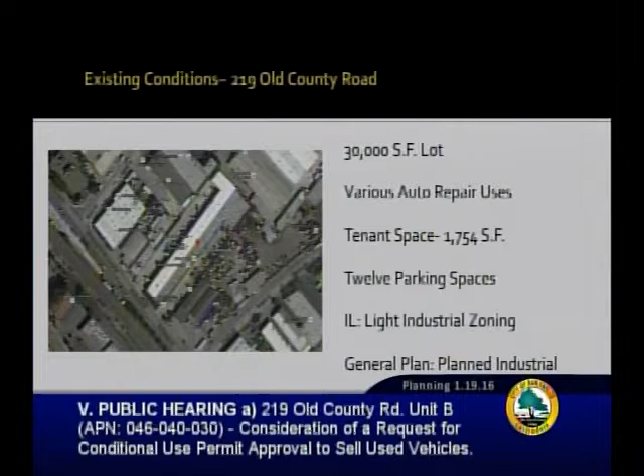The applicant is requesting a conditional use permit to add used vehicle sales to an existing smog and auto repair business at 219 Old County Road. The project site is approximately 30,000 square feet, with a complex comprised exclusively of auto uses. There are 12 parking spaces for this business, 5 inside the tenant space and 7 outside. The property is located in the IL, Light Industrial Zoning District, and has a general plan land use designation of planned industrial. Surrounding the property are uses such as contract services, auto body and repair, and kennels.

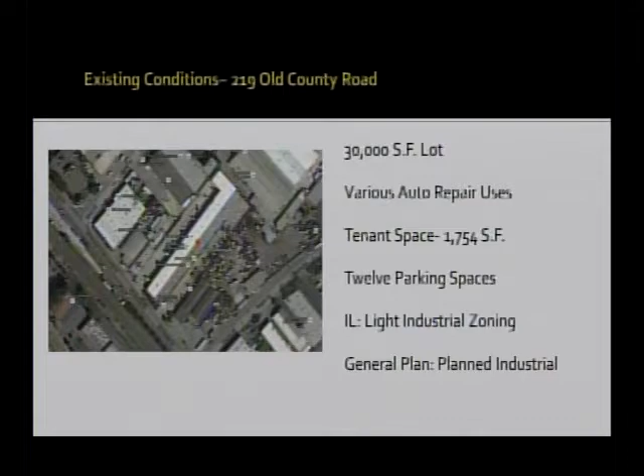The applicant proposes to continue his existing smog check and auto repair business, but supplement it with used vehicle sales. There's an office space which will be utilized for sales, and one interior parking space which will be used for auto sales display parking. Business hours will be Monday through Friday from 9:30 a.m. to 5:30 p.m. A complete analysis of the parking is within the staff report, and this existing parking is non-conforming.

However, the new use will not trigger any additional parking requirements, and therefore approval of this use would not require the addition of any parking spaces on site. All used vehicle sales will occur within the enclosed building, and no exterior changes are proposed.

A typical day for the auto repair portion of the business includes 1 to 3 cars, 3 at the most. The addition of auto sales to this space should not generate a significant amount of additional traffic, since the applicant anticipates 1 to 2 sales per month. None of the reviewing departments had any conditions of approval or comments to add, and staff has not received any public comment with regards to this application.

These are the required findings, outlined in the staff report. The proposal meets all findings, namely the proposed use is consistent with zoning code requirements with inclusion of the proposed conditions in the conditional use permit. Should any negative impacts or significant changes be proposed in the future, the Planning Commission could re-review the proposal. The project is consistent with the general plan and suitable for the site, as the tenant space is located within a multi-tenant building which contains all auto repair uses.

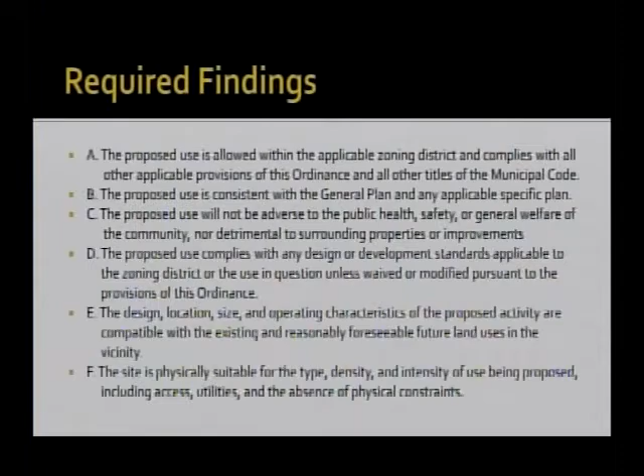The site access already exists and the addition of auto sales will not require any additional utilities or services. This is the motion you would make should you choose to approve this item. I'm available for questions, and I believe the business owner is here as well.

Thank you. Any questions for staff right now? I don't have any speaker cards for this item. Is there anybody that'd like to speak on this matter?

I just have a couple quick questions. Any concerns received from the public since we received the report? No, nothing. Okay, and then I guess what happens if the vehicle sales exceed the 1 to 2 per month? Does something get triggered? Does a new review get triggered? How does that process work?

Let me get to the conditions. I would also like to add, I believe the applicant only has a space to have one car at a time within the building. There's an additional area within the floor plan that he's proposing to use for the one car required indoor area location. Oh, I see. Yeah, and he can't reduce the number of bays, exactly.

Got it. So that brings up the question I have, which is: is he only going to be selling one car at a time? Are there going to be cars located outside in the parking spots? And if so, is he only going to be displaying one car at a time? My concern is that this not impact on-street parking on Old County Road. So can we get the applicant to answer those questions?

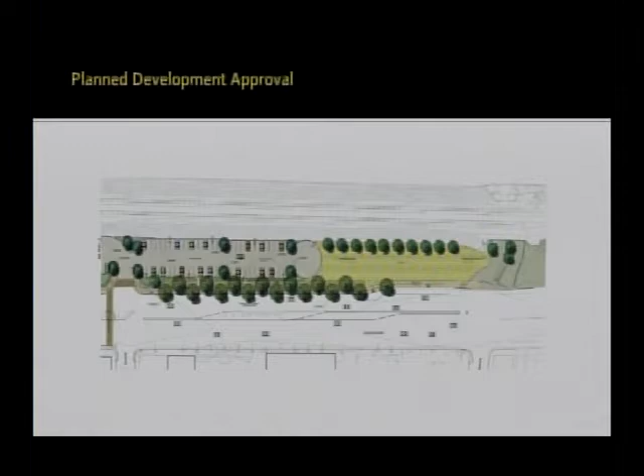I'm not going to provide a presentation about the current proposal because Samtrans has one, and they will go through it in detail.

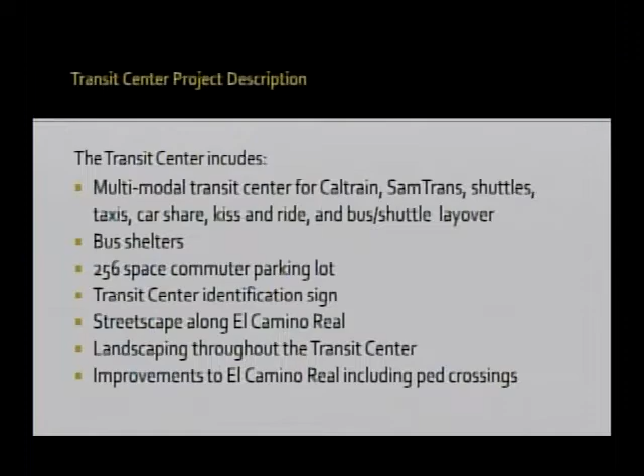The transit center includes that end of the parking lot, which provides area for kiss and ride, buses and shuttles, car share, taxis. It includes bus shelters, the 256 parking spaces, transit center identification sign, streetscape along El Camino Real, landscaping throughout the transit center, and improvements to El Camino Real, including improved pedestrian crossings.

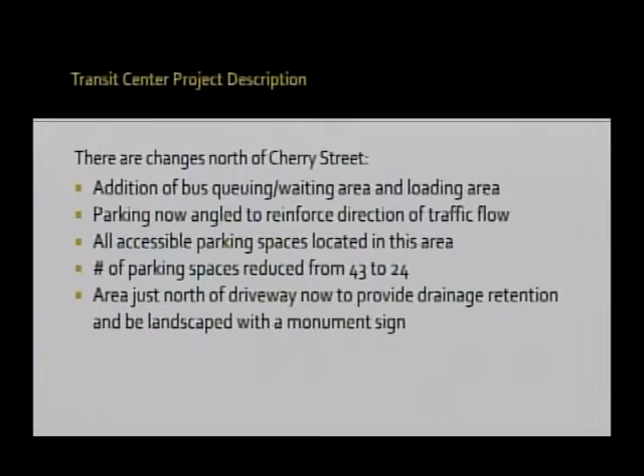As I reviewed earlier, these are the changes that have occurred in the area north of Cherry Street. And it's important that we talk here a little bit about what is the purview of the city and the Planning Commission. Projects by other public agencies are not normally subject to city review.

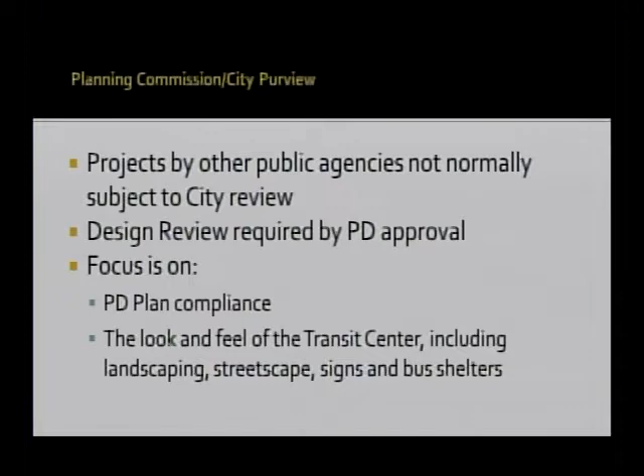Design review is required as a condition of the planned development approval, and it focuses on compliance with the planned development conditions and the look and feel of the transit center, landscaping, streetscape, signs, bus shelters, those sorts of things.

The project is not going to be subject to requirements for a dirt haul permit, grading permit, tree removal permits, or building permit, but it will require a city encroachment permit for work from the curb line to the property line, permits from Caltrans for work within the right-of-way, city permits to connect to the drainage system, and permits from Cal Water for connection to the water system.

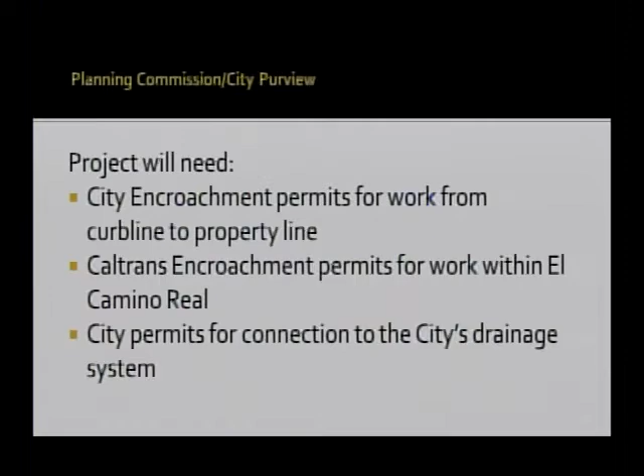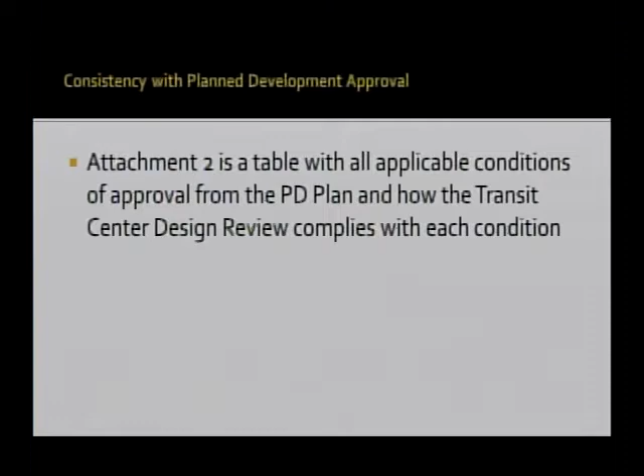The project, we went through all of the conditions of approval. It's included as a table, attachment 2, showing all of the conditions of approval from the planned development, including the mitigation measures and how the project complies with those.

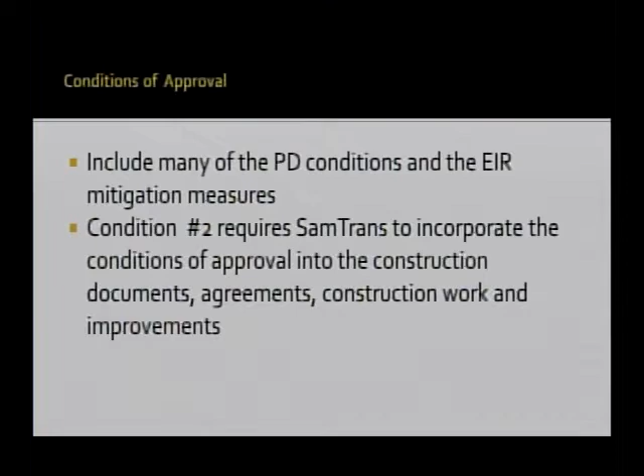The conditions of approval carry forward many of the planned development conditions that aren't specifically satisfied by the plans and the mitigation measures. And condition number 2 of the approval specifically requires SamTrans to incorporate the conditions of approval into the construction documents, agreements, construction work, and the improvements as constructed.

So the recommendation from staff is that the Planning Commission, after you hold the public hearing, that you adopt the resolution that's provided in your staff packet, the agenda packet. Please note that there was a supplemental staff report, and it is the revised resolution, which has a couple of changes identified in the supplemental staff report, including changes to the detailing on the monument sign that will be the project identification sign.

And with that, I'd like to conclude my presentation. I'm available for questions now or following the presentation by SamTrans or the public comment. Thank you for your attention.

Great, thank you, Colette. Does anybody have any questions for Colette right now, or do we want to wait till SamTrans? Okay. Who's up?

Thank you. What do I have to?

Good evening, my name is Rafael Boland. I'm a program manager with SamTrans, and I'm going to be discussing the San Carlos Multimodal Transit Center. I'll provide a brief overview of the project, focusing on some of the look and feel design features that were just discussed, then provide an update on the schedule, a brief description of construction impacts, and take any questions you might have.

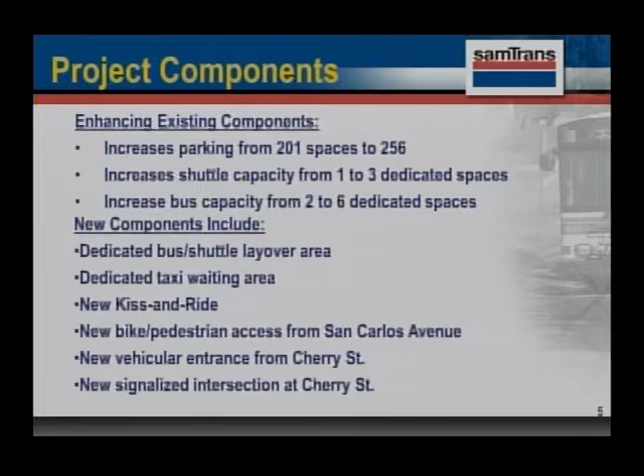New components being incorporated in the design include a dedicated bus shuttle layover area, a taxi waiting area with 5 spots, a new kiss and ride, new bike and pedestrian access from San Carlos Avenue, and a new vehicular access with a signalized intersection at Cherry Street.

Some components requested by the city include at least 23 short-term parking spaces, signed for 3-hour parking, located at the northernmost limits of the project site. There's also car share parking, and after-hour public use, with about 100 stalls available after 6 p.m. through 6 a.m. for the general public.

Finally, some enhanced safety features we incorporated, the most obvious being improved pedestrian crosswalks in the area. I'm going to focus now on some of the design components this board has specifically requested we focus on—these are sort of touch and feel type items.

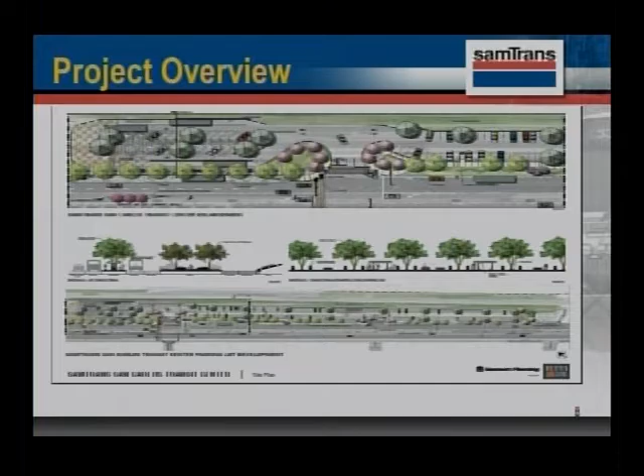One of the enhanced features is this focal point entrance sign that the city requested. We've been working closely with staff on this element.

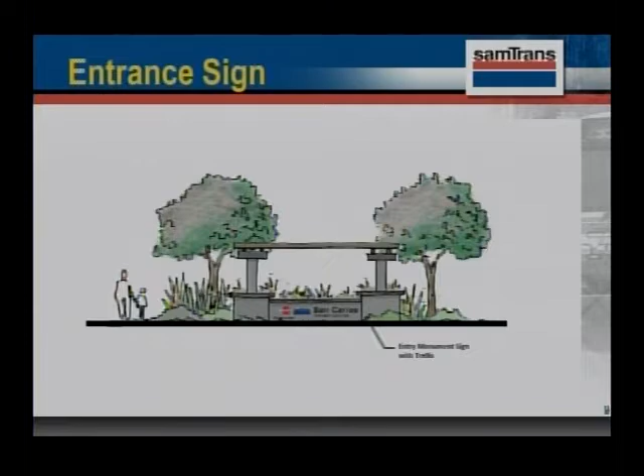Another element city staff worked closely with us on is an enhanced streetscape, in conformance with city standards but also with the Grand Boulevard Initiative's own standards. This includes enhanced pedestrian sidewalks, as well as enhanced coloring and focal point crosswalks.

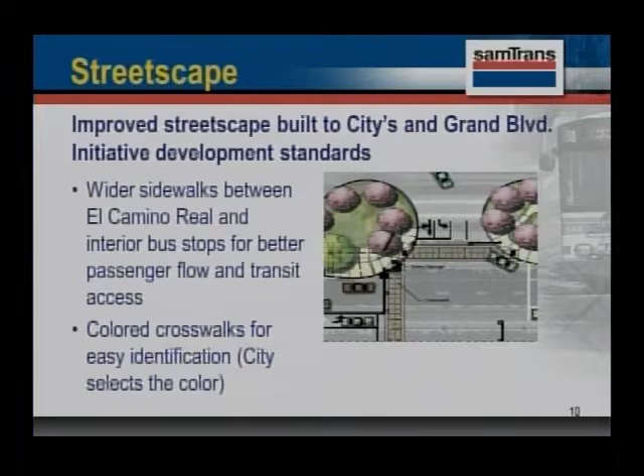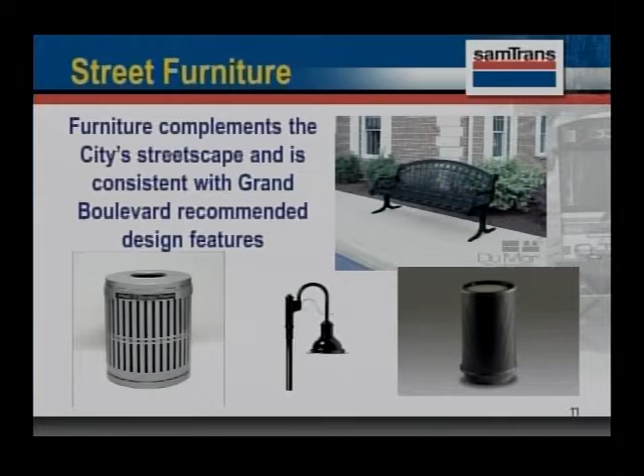Street furniture was another element the city had a lot of input on, once again consistent with the Grand Boulevard Initiative—so lighting, waste disposal, benches, et cetera.

Some of the landscape features: the city requested that replacement trees be of a specific species, Zelkova serrata. While the project is removing existing vegetation to make way for the transit center, we're going to replace more trees than are ultimately removed as part of the project.

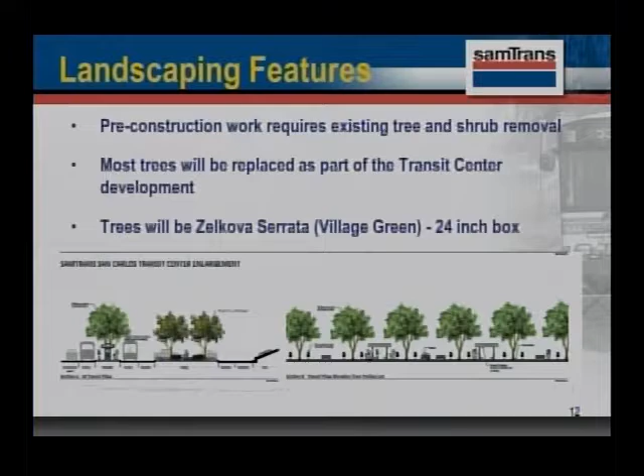I mentioned the retaining wall—this is a structural element that exists only at the northernmost end. One feature changed from the previous iteration was the configuration at the northern end. The challenge was fitting all the parking, shuttle, bus, and drop-off within the limited right-of-way available, and the truth is it just didn't fit—something always had to give. Since this is the most northerly area, closest to the station and the most valuable parking, we wanted to get it right. So we went back and looked at an engineering solution: we're going to build a short retaining wall into the existing berm.

And what that does is it frees up a little bit of space to allow more compatibility. So when I say retaining wall, it's limited to about 4 feet in height. And one of the elements we're going to discuss with staff is the look and feel of that wall, the color or the texture.

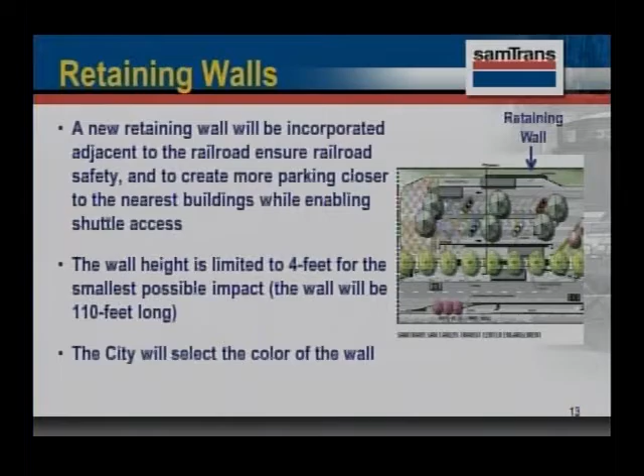The bus shelter was another element that was highlighted by staff. So we are essentially installing a customized shelter to meet the city's requirements. And then kiss and ride was another element that was important.

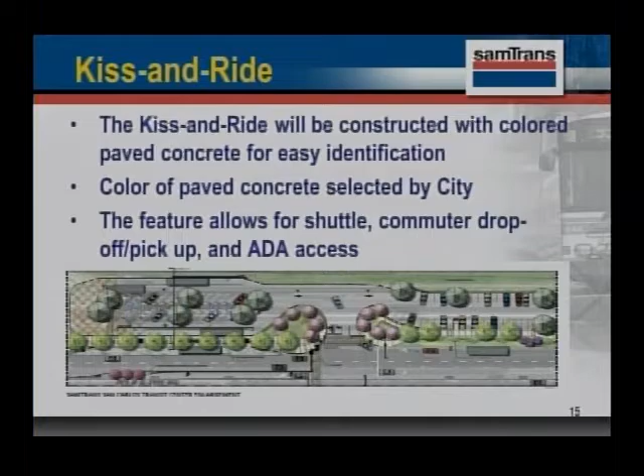And so the new station, I mentioned the increased number of parking. Again, that doesn't include such improvements as the kiss and ride. So these will be specifically marked out as kiss and ride. They'll be colored, we'll work with the city staff on that. And they are located on the northernmost end along with the ADA, the shuttle drop-off, et cetera.

Very briefly, where we are with the project schedule. This is an update, probably more recent information than we provided last time, but essentially advertising award has occurred. So we've awarded the contract, but we have obviously not given notice to proceed on the work.

So where we are now is we have some site clearing work that has to happen in January, and that's essentially the removal of vegetation. That's going to start early January, and the goal is to be done before February. Notice to proceed for the main project will occur sometime in late February. It's approximately 5 months worth of work, actual shovel in the ground type of construction.

Some of the impacts: the majority of this work is daytime activity. Luckily, although it is adjacent to our railroad tracks, it does not impact our operations for virtually the whole work. So there are, however, some elements that will have to be at night. So the wall, which I mentioned, is right up against the railroad.

It's possible some of that might have to be night work. And then anything that has a direct impact on El Camino could potentially, depending on how that works with Caltrans, might require some night work on that location. So in general, of course, our intent is to avoid night work. But again, if it conflicts with operations, that's where we would have to go to night work. In any event, we would notify the public well in advance of that.

The other element I wanted to focus on is the use of the parking lot during construction. To be clear, it will be open and parking will be available for the entire period of construction. So it's not going to be closed. However, in the interim, we may have to stage construction in a way that while we're working on one end, parking's on the other. Our goal is to get it all done and use the existing, but if need be, we're going to basically prioritize keeping parking open.

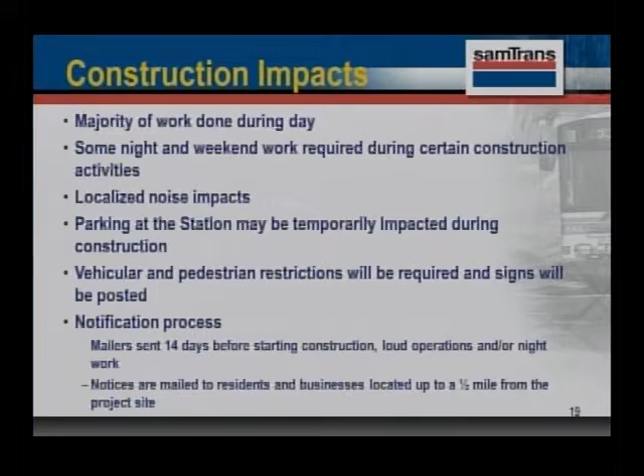And then I can take any questions you might have. Who wants to start?

Go ahead, I just had a quick question. I'm a little confused about the parking spaces, and I see north of Cherry there was a reduction in parking spaces, and south of Cherry there was an increase in parking spaces. Is that correct? That's correct, yeah.

Okay, so the net is what? The net gain is: so there's currently 201 spaces, and in the after condition there'll be 256 spaces. That being said, what you don't see in that number is the dedicated spots, so it's 256 plus the dedicated spots. Today there is no dedicated spot for things like shuttle drop-off or taxi. So it's 256 plus whatever you want that to equal out to. Okay, great.

That was my question. Let them go, because I got lots of questions. Scott's got lots of questions. Yeah, go ahead, because I think I had most of my questions answered, actually.

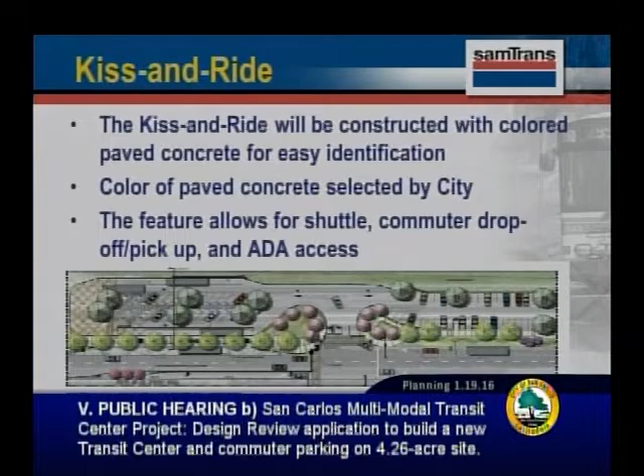Do you have any shelters located in the drop-off? You're going to have all these shuttles dropping people off, and they'll all be waiting in the drop-off area as they come around the corner. Is there any type of shelter for anybody there?

You're talking about against the retaining wall? I'm talking at this end, where the drop-off is - where the kiss and ride is, where you're dropping off shuttles. That's where the kiss and ride is, but it's also where all your shuttles are dropping off and picking up all the people coming off the train and waiting. So are there no shelters in that middle area? There are no shelters in that middle area.

That being said, this is the closest area, obviously, to the existing station, right? There is quite a bit to the left of the image you're seeing, but no, there are no shelters in that location. That's something you ought to consider?

That line is also literally the line of our improvement, so we used every inch that was available to us to put in improvements. So anybody that gets off a train that's waiting for, say, an employee shuttle or a Samtrans bus that comes in there is not going to have any shelter at all?

Well, there's the shelters along El Camino, and there are shuttles. What I was suggesting is, if it were me, I would wait in the before location rather than walk out too much earlier. But no, they will not have a dedicated drop-off shelter on that side. That line I alluded to is essentially the property line in the after condition.

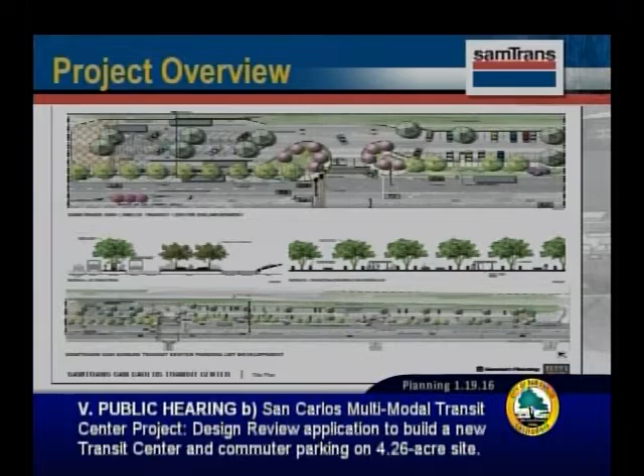From a landscaping standpoint, you really have to talk to a landscape architect, but I guess the commission could condition it to ask for a taller tree in that location instead of, as an alternative to the Chinese pistache, you could ask for a taller tree.

But I think that it should all be consistent. Yeah, that's what I was going to say. I don't understand the scale. I wouldn't be for replacing 2 trees and keeping everything else the same. It just doesn't make sense from a scale standpoint. You'd want all those Chinese pistache to be replaced with a taller tree.

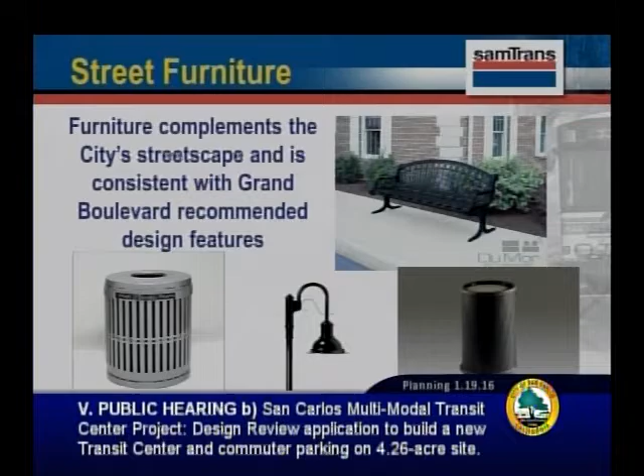There it is, okay, so they're going to be like this, not the single bulb that sits on top. Because if I remember, the ones on Old County have a globe on top that's bright all the way around and then shines down. Are the ones at the train station just bright all the way around? So these are the ones on El Camino.

I guess the question would be internal to the parking area. I don't know if there's any tall lights inside the transit station area, but we know the ones on El Camino are designed like this. Inside, it's slightly different, it still has a baffle, but doesn't look quite as elaborate. In concept it's the same idea, directing lighting so you don't get splashback. It's facing down, not facing out, because they'll be tall enough to be seen from the east side neighborhood, so I want to make sure they shine down and not into people's yards.

Great, thank you. Any other public comment on this item?

Can I get a motion to close the public hearing on this one item, please? I move that we close public comment on this item. Second. Can I get a roll call vote?

Commissioner Harper Pedersen? Yes. Commissioner Marsters? Yes. Commissioner Silverman is still absent. Vice Chair Bergman? Yes. Chair Gutierrez? Yes.

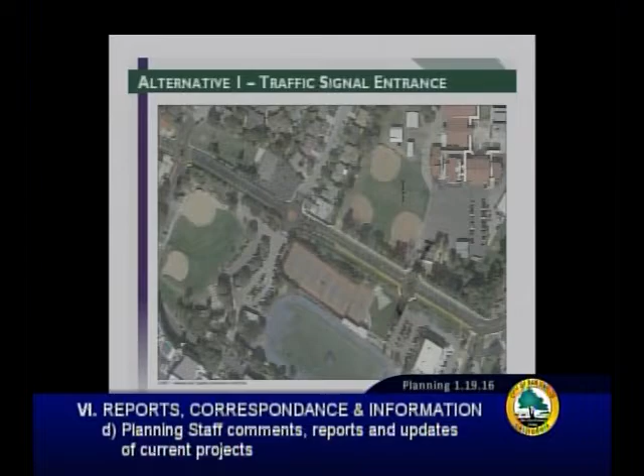As you can see off to the left, there was also a roundabout discussed for the intersection with Chula Vista and Alameda, and then a traffic signal down at the intersection of El Verano. This was evaluated along with another alternative which had all roundabouts at the entry points.

The interesting part is that the roundabout, while not a very common feature here along the peninsula, though getting more common in certain communities, would replace the 4-way stops present at El Verano and Chula Vista, which pretty much everybody recognized as the main traffic clogs for getting through the corridor. That, combined with pedestrian crossings for school kids at those times of day, just wasn't allowing for any real good flow of traffic.

The roundabouts allow for access points from either side, on the school or the side street. They do allow for some pedestrian crossing, but what they do is slow traffic speeds. So traffic speeds in the corridor would be down in the 10 to 15 mile per hour range, but moving slowly rather than stop, stop, stop, stop, stop. So we began to gather around the idea that roundabouts were a good potential solution for the intersections within the corridor.

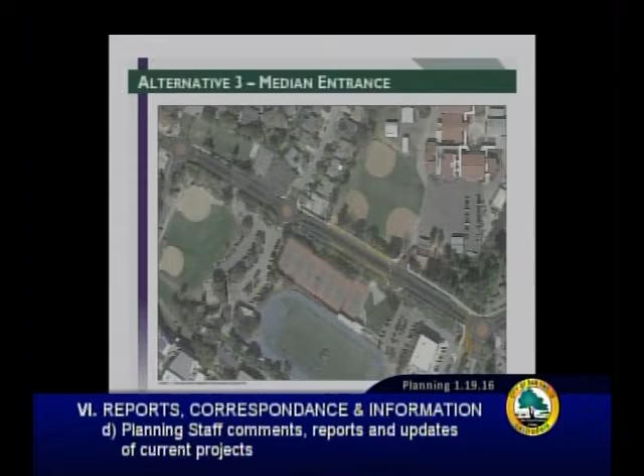On the frontage for the Tierra Linda campus, for example, we're going to be setting back that frontage and providing continuous sidewalk all the way along that edge. That's an advantage that is not there now. If you've been by that point, there's a sidewalk to a certain point, and then after that it's just dirt along the edge of the roadway, kind of behind the curb. So we feel like this is a really good feature that will help for pedestrian accessibility.

So the frontage improvements, again, the new sidewalk, we're getting some widening through there. We have bike lanes that we'll be maintaining. The pedestrian crossing areas will have refuge islands for the pedestrian crossings, so instead of having to cross all the way, you can cross to a midpoint and then cross again when it's safe. The fences in the median area along Alameda will prevent that random crossing, and the crossing guards, we believe, will help to organize the pedestrian behavior.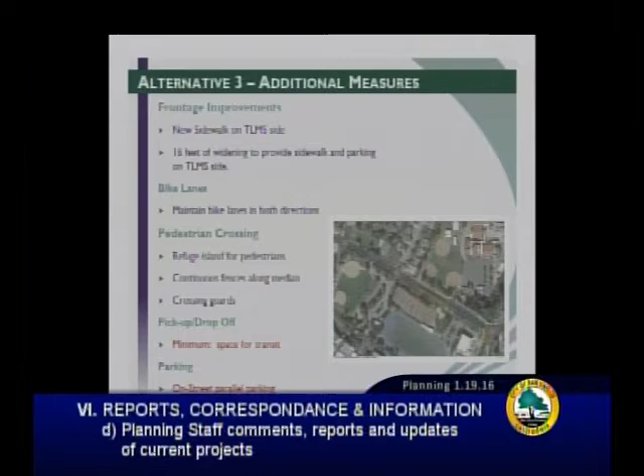So the features for Alternative 3 have come together. This has been essentially endorsed by the agencies, or it's going to the agencies for endorsement of the final plan, but the working group itself endorsed Alternative 3 as the preferred alternative for the traffic study in this area. So the final report is being prepared by our consultant. It should go to each of the agencies for an endorsement, which would be in the form of a resolution.

We would be able to take that and then apply for grant funding to help construct this. We expect that the 4 agencies together will make a very good grant application, and the collaboration and cooperation between them will help achieve greater points, because this is not just one isolated spot solution, this is one that creates solutions for a corridor.

We'll have to proceed, once we receive funding, with the design and environmental approval, and then it could be that construction needs to take place during the summer just because of the traffic impacts. We're giving it a 3 to 5 year window to be completely done if we can line up the funding, but we would hope to be moving sooner if we could get the funding to begin that work.

But we believe we've come up with a really good solution. One of the interesting things is that before the commission tonight, the development proposal you'll be hearing about at the church property - essentially, the developer and staff have worked hard to incorporate and integrate that plan to work well with the Four Corners traffic study design. That was important. It was a late arrival into the process, but we were able to work with the developer to come up with what we think is going to be a good solution.

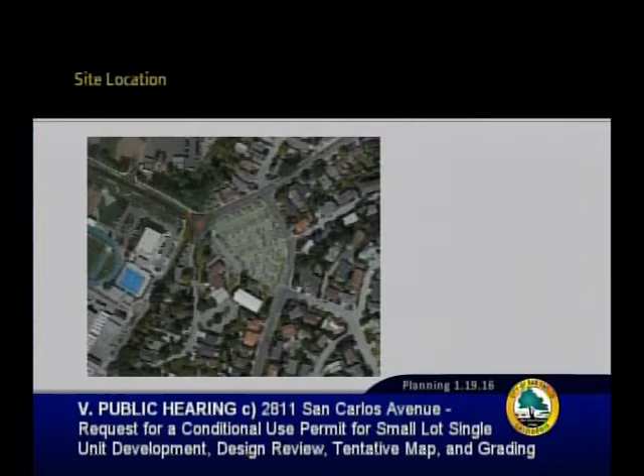Just to orient you briefly, the subject site is located at the corner of San Carlos Avenue and Club Drive. The site is located near two churches, a preschool, Carlmont High School, Tierra Linda Middle School, and the subject site is zoned RS6, which is our single-family zoning designation, and it's surrounded by single-family homes.

The project involves demolition of the existing church building and the associated site improvements for the construction of 11 new single-family homes with a private internal roadway and landscape improvements.

The design entitlements before you this evening include design review approval of the design of the new single-family homes, a conditional use permit for the small lot single unit development standards, tentative parcel map approval for the subdivision, grading for the cut and fill of approximately 8,100 cubic yards of soil, and approval of a below market rate housing plan to allow the payment of an in lieu housing fee.

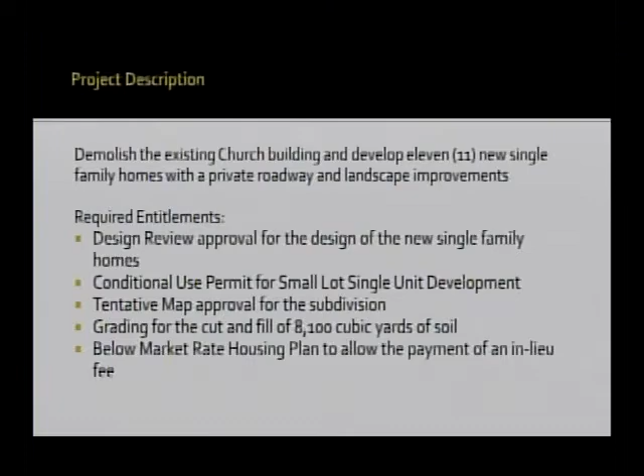First, with design review, the developer proposes 3 different home plans with individual lot variations. All of the homes are designed with contemporary architectural style. The one on the screen right now is Plan B, located on Lot 1, which is located along San Carlos Avenue.

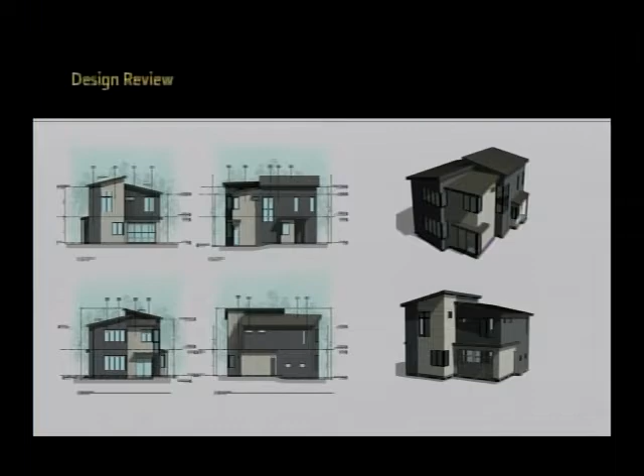That top view of the perspective would be the front that would be viewed from San Carlos Avenue, and the lower is the rear that would be viewed from the internal road where the garage would be oriented. The exterior materials include a mix of stucco finish, Hardie siding, and the roofs are proposed with a standing seam metal roof.

This is Plan C, which is located on Lot 7, located along Club Drive, and that 2-story front elevation is oriented to Club Drive, and then it steps down to the 3-story rear level elevation, which is oriented to the internal private drive.

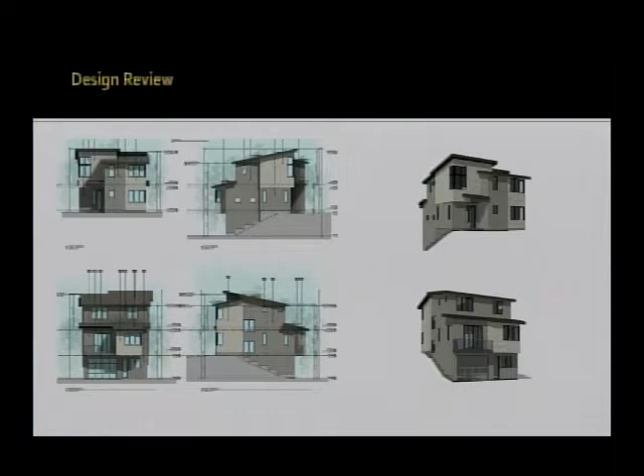This is the view as you would see it from San Carlos Avenue. So that top view would be the homes located along San Carlos Avenue, and the lower view would be seen from the internal private driveway.

And I can pass it on to...

The developers hired a color specialist to assist with the color selection, and so I'm just passing around that color board for you to review.

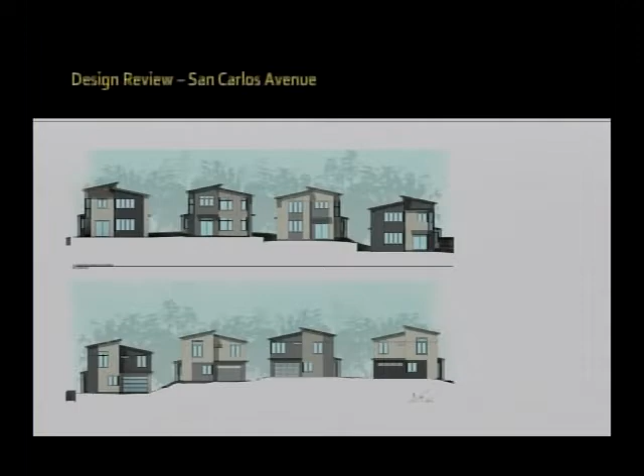And then this is the view from Club Drive. The top would be facing Club Drive, and that lower elevation would be the rear of the homes that would be fronting on the internal private roadway.

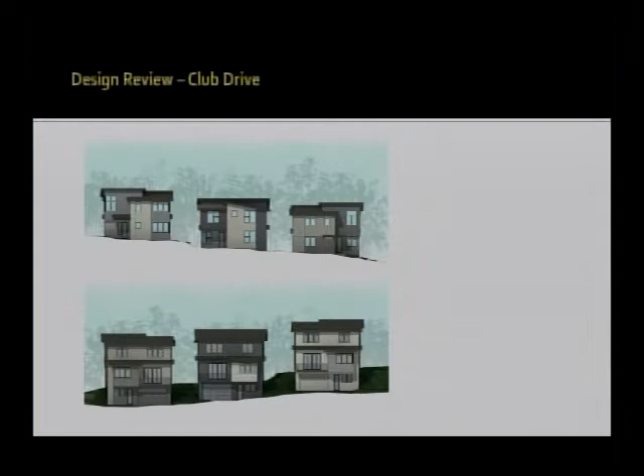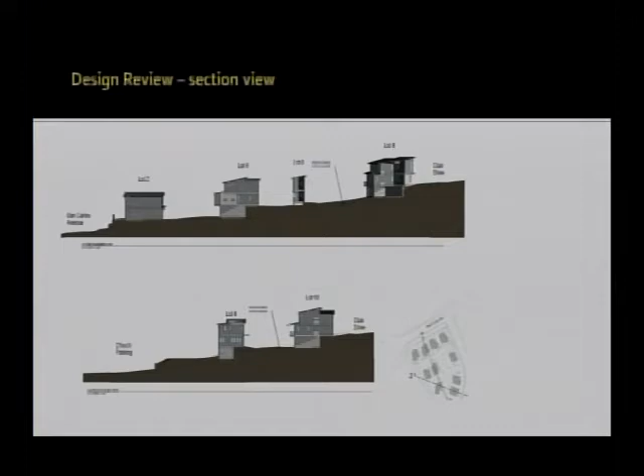Landscaping, as I noted in the staff report, there's significant landscaping along the perimeter of the site, and it does comply with the gateway overlay zone with the wide landscape strip along San Carlos Avenue.

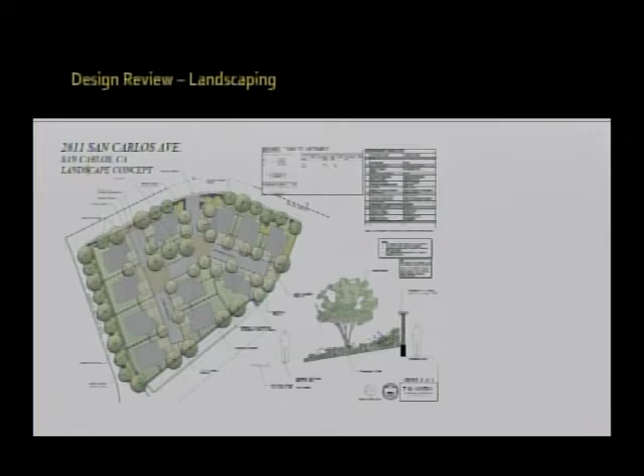The conditional use permit request is to apply the small lot development standards, and that allows a minimum lot size of 2,000 square feet with a minimum 30-foot width. The homes are proposed with lots of 4,400 square feet to 6,400 square feet in area, so it does comply and exceed the minimum lot size standards.

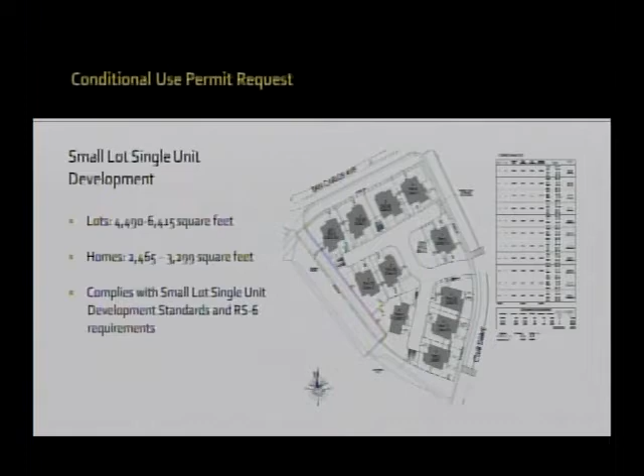And then the home sizes range from 2,400 square feet to a little over 3,200 square feet in area. This project does comply with the maximum project site floor area and the minimum site landscaping. There's also the small lot standards with minimum personal storage space, which is not included in the standard single-family zoning district, as well as minimum usable open space. The project does comply with these standards as well as the RS6 development standards.

The tentative map is to establish the individual lots for the 11 new single-family homes, the common open space, and the common area for the new 25-foot wide private internal streets, as well as the adjacent parking. And that is something that's a little unique to this project.

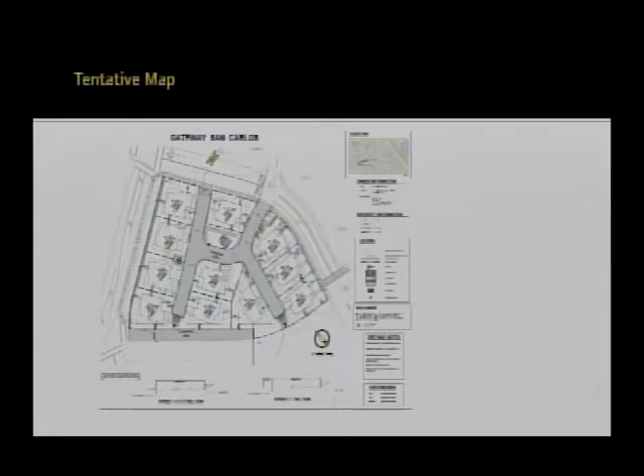As you see on the lower portion of the screen, it's outlined as common area shaded, and that actually is going to serve the parking for the adjacent church. The project also provides 8 guest parking spaces within that private roadway area.

Grading and dirt haul, the proposal is to cut approximately 2,300 cubic yards of soil, fill 5,800. You do the math, you're importing 3,500 cubic yards of soil. And the dirt haul route takes you from San Carlos Avenue, Alameda to Ralston, and then most likely Highway 101.

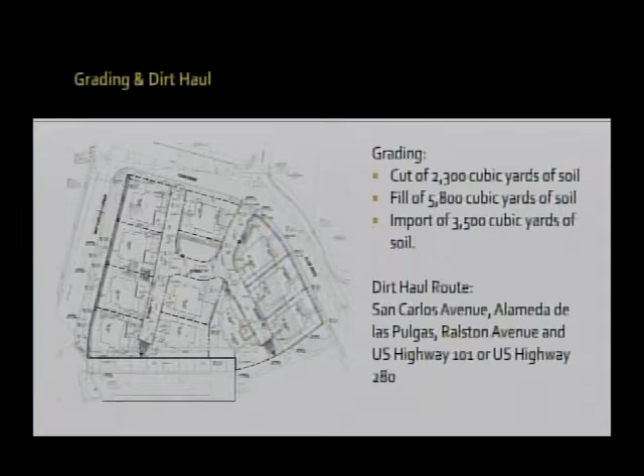The code requires that affordable housing be provided on site, or if the developer is able to show a financial hardship, that gives the opportunity to pay the affordable housing in-lieu fee as an alternative to providing on site. Here, the code will require 1 low-income unit and 1 moderate-income unit.

We've estimated the sales price of the low-income unit as $193,000 and the moderate-income unit as $450,000. The developer has submitted the financial feasibility, we've had that reviewed by our outside consultant, and staff does concur with the developer's request to pay the fee rather than provide those units on site. The fee is estimated at just under $1 million, and it'll be calculated at time of building permit issuance for payment due, I believe, at occupancy.

The developer did conduct several outreach meetings with the community, and concerns were related to the size of the development, parking, traffic, and view impacts also expressed. The developer was able to revise the project to respond to many of those comments. I'm sure you'll hear some more this evening.

Staff provided the public notice to all property owners within 300 feet and also utilized the developer's expanded notice that included everyone that attended the meeting and published the notice in the Daily Journal.

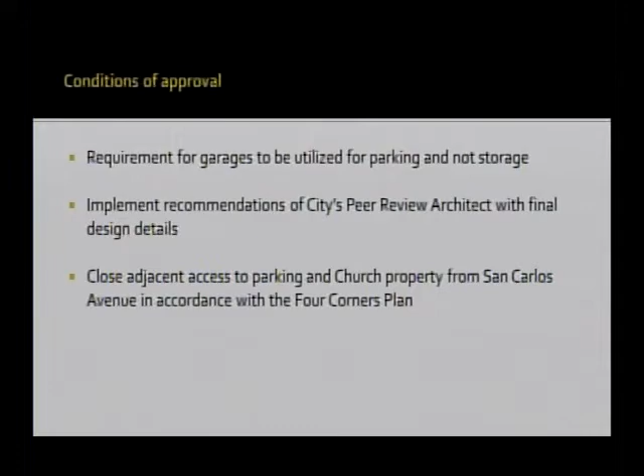And here's the motion before you. I would be happy to try to answer any of your questions, and the developer is also here to give a brief presentation.

Does anybody have any questions currently? No, but I think I wanted to disclose the ex parte communications with the developer prior to this meeting to review the plans. Okay, so I did the same. I met with the developer in late December. I did the same, yeah. In January. I did as well, but I think it was in December sometime. I don't remember exactly when, but okay.

I have one speaker card, which I'm pretty sure that's not all that wants to speak, so. Can I ask one question of staff before she sits down?

So you made a requirement that the garage be used for 2 cars. How do you enforce that? Typically, it's enforced by the homeowners association, and we'll make sure that's included in the CC&Rs. But if the homeowners association fails to enforce it, then the city would enforce it through our code enforcement process as a violation of the conditional use permit design review certificate.

So is that because there's no parking for vehicles on the streets? Right, there would be no parking directly in front with the streets with the internal road. There are 8 parking spaces that would be available that somebody could certainly use. And so what if somebody only has 1 car? Then they would need to keep the other free for their visitor. So they're still not allowed to use the garage for storage, even in anticipation of a visitor? Correct.

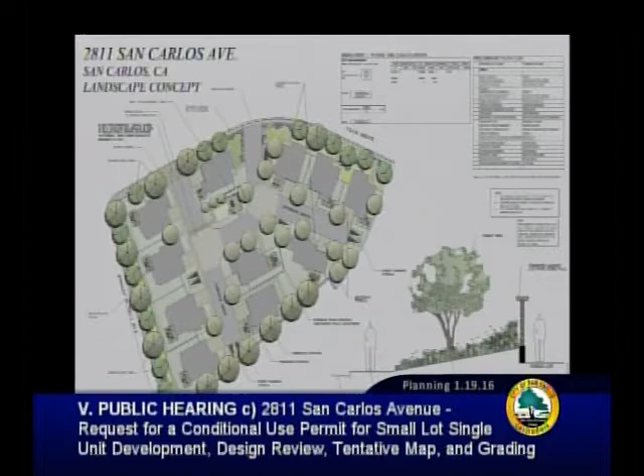And can you point out on this where the communal space is? Is that the middle space I'm looking at right there? Yeah, if we go to the other one - when you enter in, the space off to the side is the communal gathering space. Then go back to the enlargement. Okay, I think in my mind I thought that was a house, each house's kind of landscaping plan, and it's not. Okay.

Since you're up here, Scott, do you have tree questions? I do. All right, shocking, but I've got a few. Oh yeah, let's just start with trees.

I looked at your preliminary plant list, and it really didn't tell me what size plants. In discussion with the developer, all the tree sizes were 48 to 60-inch box trees, in an effort to give a more mature feel. So they're minimum 48 up to 60-inch box trees. So you're starting off with big trees. Okay.

Because it looked to me like there was only one thing here with a 1-gallon plant, but nothing else talked about the size of any of the plants. Right, the shrubs would be a variety anywhere from flats to 15-gallon, running the gamut depending on the specific plant material, and then the trees would obviously be the larger sizes.